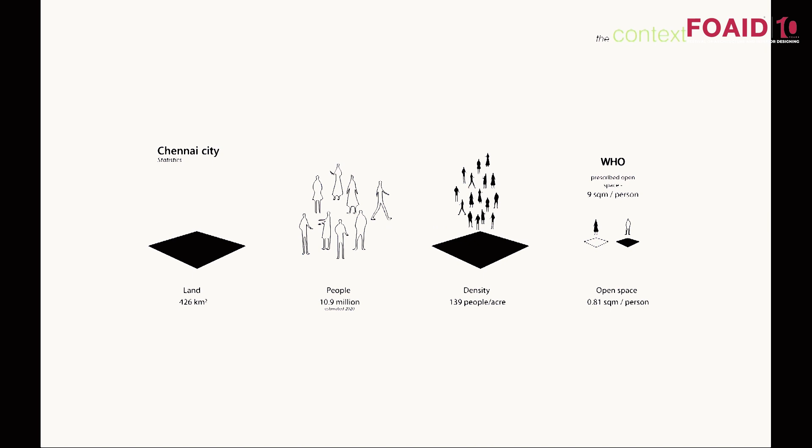So what is the context in which we practice? I think it's very important to understand our context, because much of our work is driven by this understanding of what that context is.

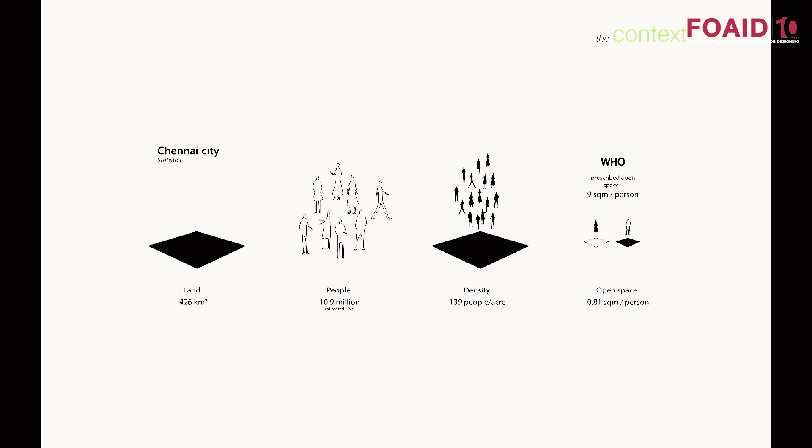This is, for example, Chennai as a city. It has a land area of about 426 square kilometers with about 11 million people, and has an open space ratio of about 0.81 square meters per person. If you compare that with what WHO proposes, one needs about 9 square meters per person to create a livable city, and we are at about 0.81 square meters per person.

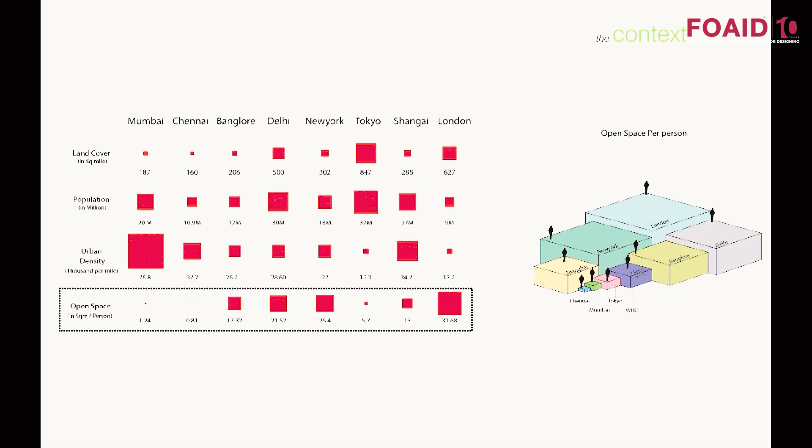If you look across the country, you will find similar conditions in many cities, other than probably Delhi and Bangalore, which traditionally had large swaths of open space. Most cities struggle to create this kind of open space. Another statistic is that about 50% of urban India goes to work by foot and non-motorized transport, which makes us extremely sustainable the way the cities are right now.

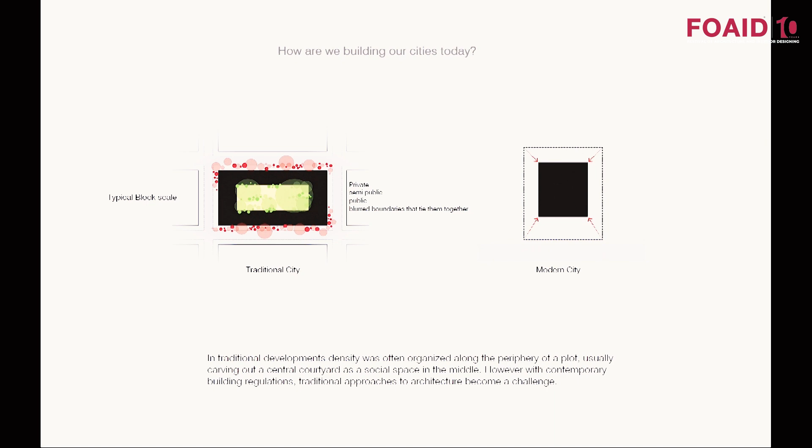If you look at our development regulations, we are actually organizing density in the most insensitive way, with the idea of creating not a sustainable walkable city, but a fragmented, non-sustainable one. If you look at the traditional figure ground, density is often organized around the periphery, while if you look at modern cities, the way we build, looking at our building regulations, we leave a setback and put the density in the least useful part of our site.

This becomes an extremely challenging proposition for us when we practice in a context like this, and hence we continue to create cities which are dominated by cars and not by people.

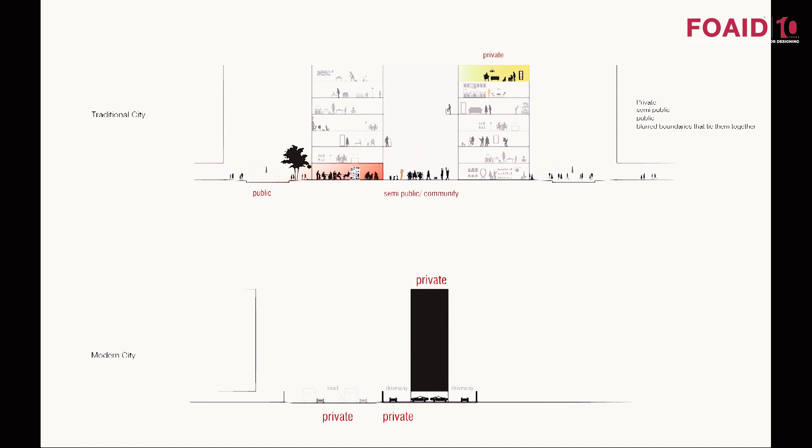A lot of what we do is a result of the kind of building regulations we have. On top is your traditional development parcel, where buildings come in at the periphery with a courtyard in the middle. At the bottom is how we build our cities today, leaving setbacks taken over by cars and creating an object along the city. Our cities then become a collection of objects without any relationship to the city itself—a collection of real estate plots.

So for us as a practice, it was about mediating between these two scales, the city of objects and the city of people, and how you try to negotiate that realm and create a wonderful city for people.

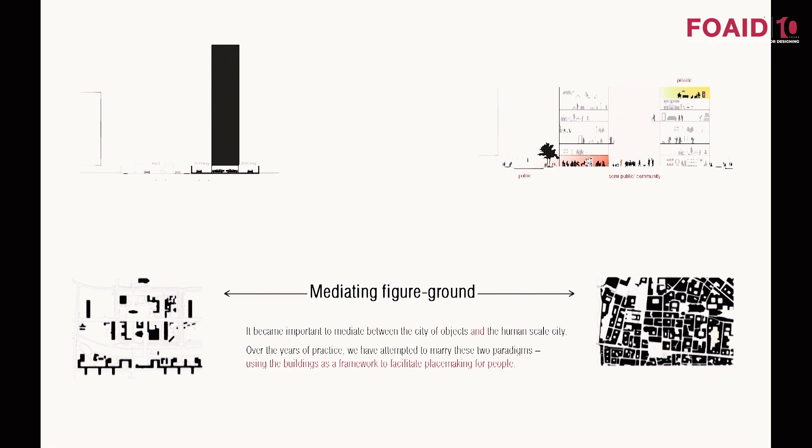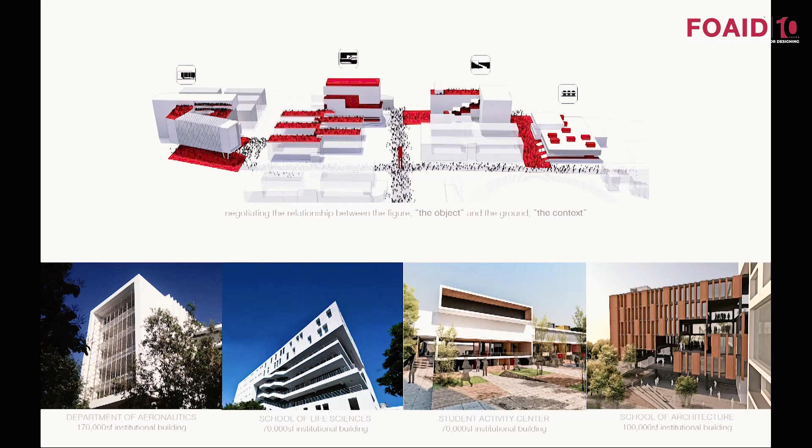These are a set of projects we've finished within a university in Chennai, where we continue to work on these aspects—looking at how to negotiate the relationship between the built and the unbuilt, between figure and ground, and working around existing building regulations to create places for people. This is a large, about 60-acre campus.

We did multiple buildings within the university. This first building is the Department of Aeronautics, where you can see in the section of the building that negotiation between built and unbuilt, and the idea of working with existing building regulations to create places for people.

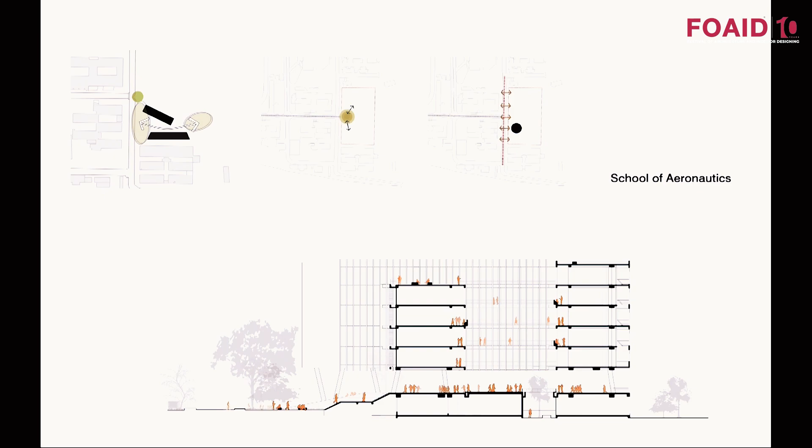Here is a campus which completely opens up—it's not an enclosed campus. The building just opens up to receive the larger campus. It becomes a wonderful place to come together and celebrate the idea of coming together, academics, etc.

So the building is lifted up, allowing the ground to be very porous. In a climate like Chennai, it becomes a wonderful place to congregate, and it just gets taken over by people.

In many ways, what Robert talked about in the beginning—how do you look at buildings as places as opposed to buildings as objects? Many of our explorations come from that thinking: how do you create places for buildings for people?

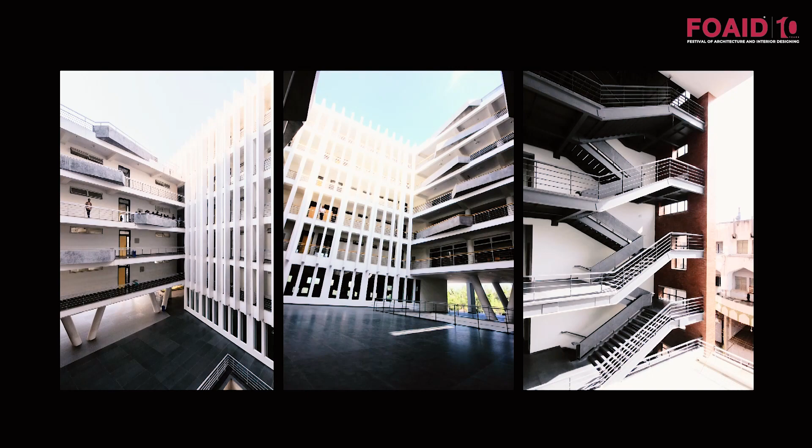It becomes, and when you start to build denser—because in this case a horizontal campus became a vertical campus—as you build denser, how do you allow density to be lighter? The idea is engaging with aspects that evoke your other senses, like light, air, rain, etc. How do you embrace them, and allow them to be experienced in a larger, higher density development?

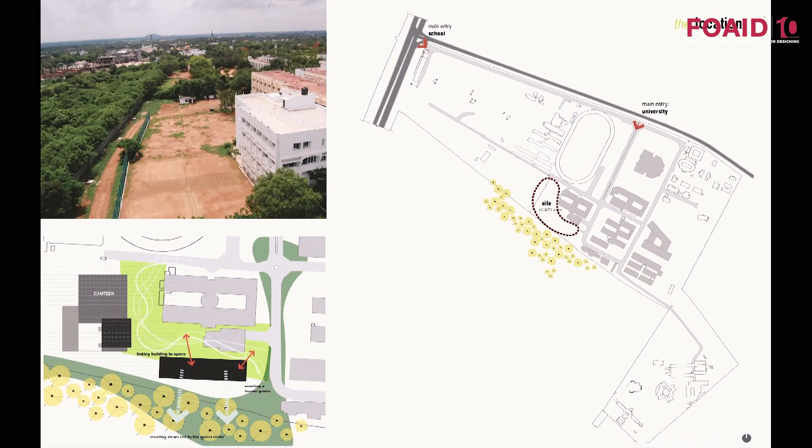This is the School of Architecture, which we just completed—again a very tight site within the larger campus. We started negotiating: we lifted up the building and allowed the campus to come into the building.

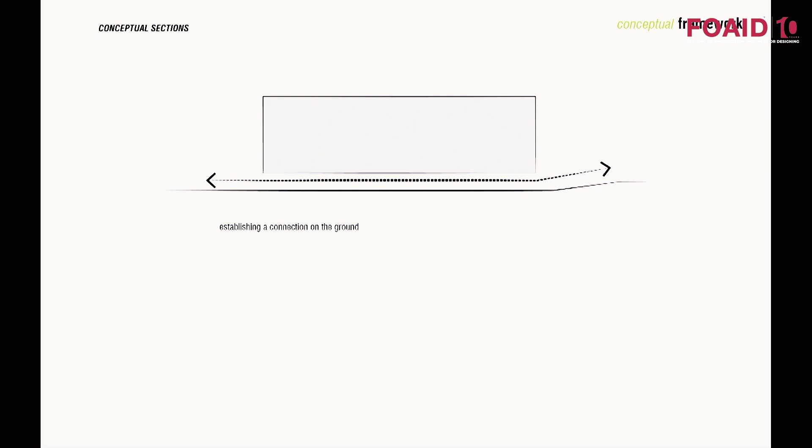We started with an atrium in the middle, but realized it wasn't working because it was a very rectilinear site. If you continue to develop the traditional way with an atrium, courtyard, etc., we realized it doesn't create the kind of spaces we need, especially in an architecture school.

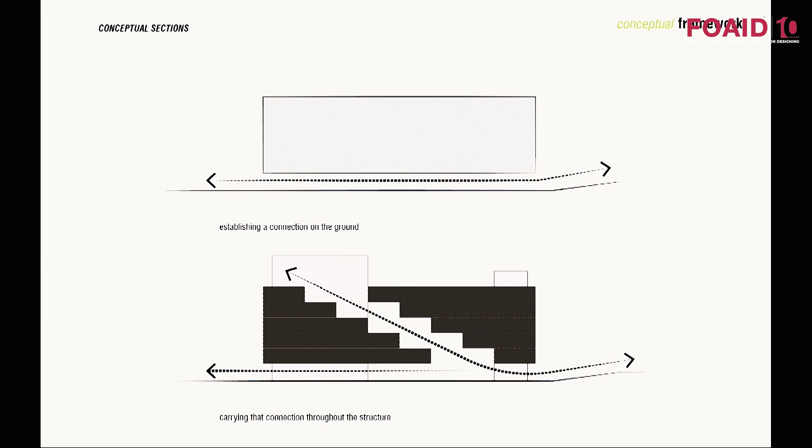So we created something called a sectional courtyard. It allows a courtyard on each floor, which then opens up into the next, and the next. In other words, that courtyard is created in section, and in a climate like Chennai, it allows you to be in that space throughout the year, throughout the day.

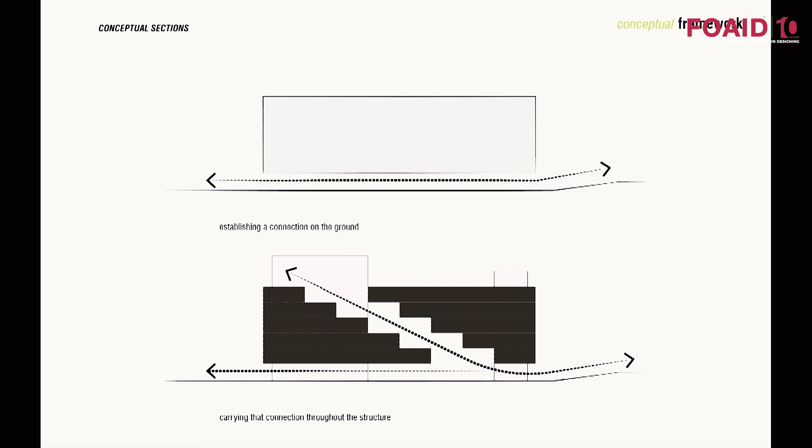It also allows us to create a new configuration of built and unbuilt, a new relationship between figure and ground, where the ground is actually within the figure in many senses. These are just some illustrations of how we handle this.

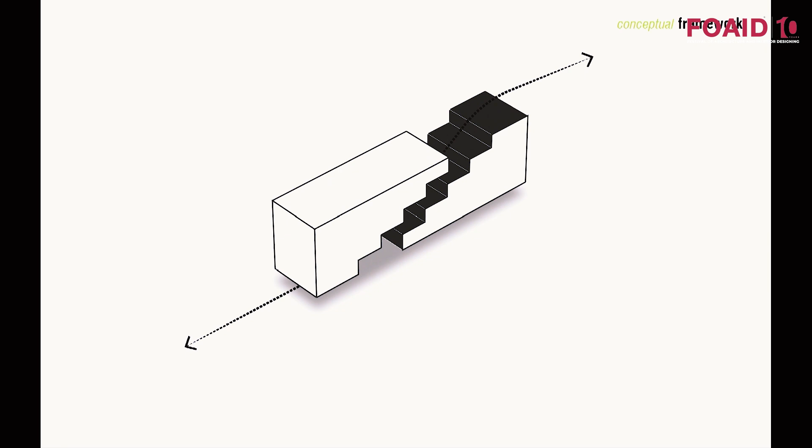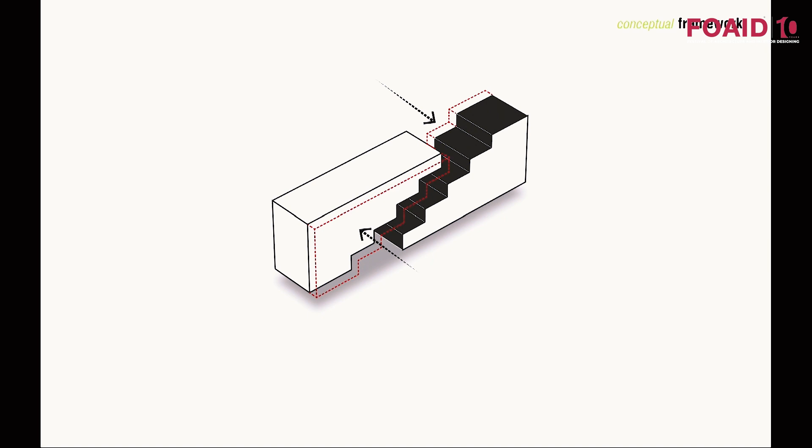We lifted up the building, and that space is carved out from it. We then allowed that space to cantilever over—one block cantilevers over the other to protect the space from the southern sun, so it's always shaded through the day. Then the larger program comes and hugs it.

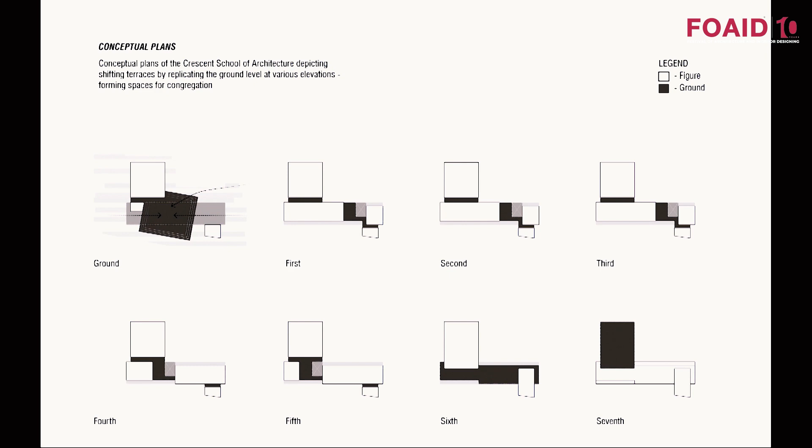These are diagrams of each of the floor plans. You can see each floor has a courtyard—the idea of creating identities for the people who occupy it, creating a sense of place, and allowing people to take over the building. The ground is left open more as an exhibition space, and each courtyard opens up, becoming a language of the building as well.

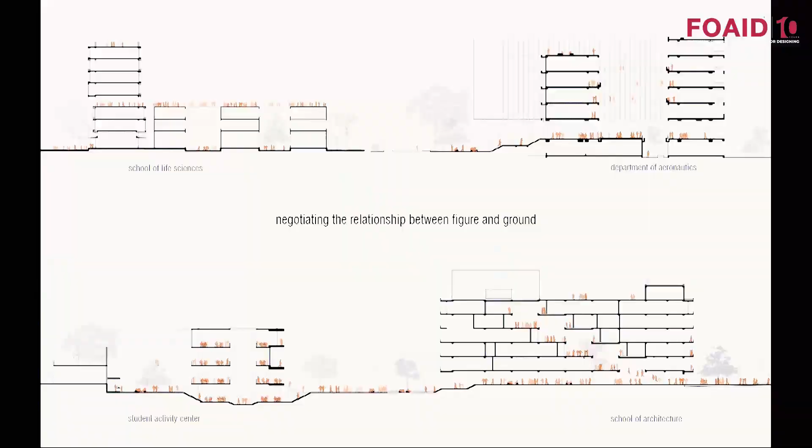Again, a very open campus, very porous campus—it allows the building to largely be a thoroughfare in many senses. These are some of the other buildings we are doing on the campus. You can see that section becomes a crucial part of dealing with density, creating spaces for people, and looking at buildings as a placemaking exercise.

Our thinking in architecture parallels our thinking about cities. It becomes important to negotiate between the private realm of the building and its role in the street and neighborhood as a means to strengthen community and local identities. Ideas of multiplicity in use, intensive typology mixes, and reconfigured spatial interdependencies need to be pushed to new boundaries. We believe the process of design must embrace all the complexities of context and allow the building to truly become an extension of the city. Irrespective of scale or ownership, the act of building collectively becomes the act of shaping our cities.

Housing is something we've been dealing with for the past 7-8 years. It's important to understand that housing is one of the most difficult typologies we deal with, especially in our context. Housing is a precondition both for work and for leisure. More than any other item of consumption, housing structures how individuals interact with others, communities, and wider collectives. No other modern commodity is as important for organizing citizenship, work, identities, solidarities, and politics.

Housing at many levels is under attack today. It's caught within simultaneous social conflicts—between housing as lived social space and housing as an instrument for profit making, between housing as home and as real estate. This is what we encounter every day, especially when dealing with housing as a typology.

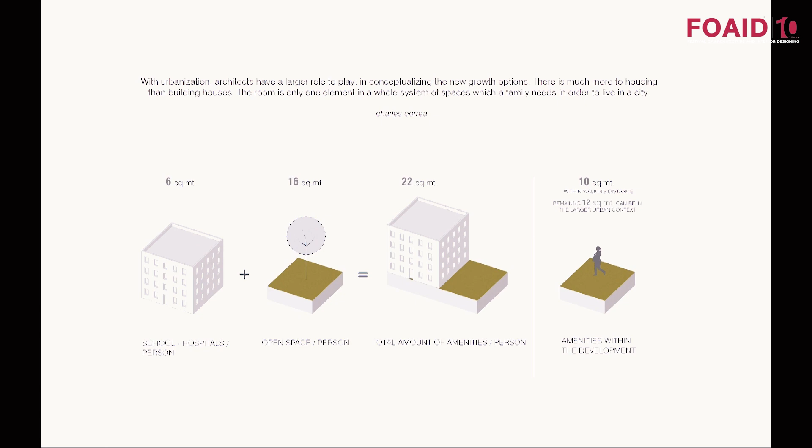This is something from Correa, who says that with urbanization, architects have a larger role to play in conceptualizing new growth options. There is much more to housing than building houses. The room is only one element in the whole system of spaces which a family needs in order to live in a city. He argues that about 22 square meters per person is required to create a livable city.

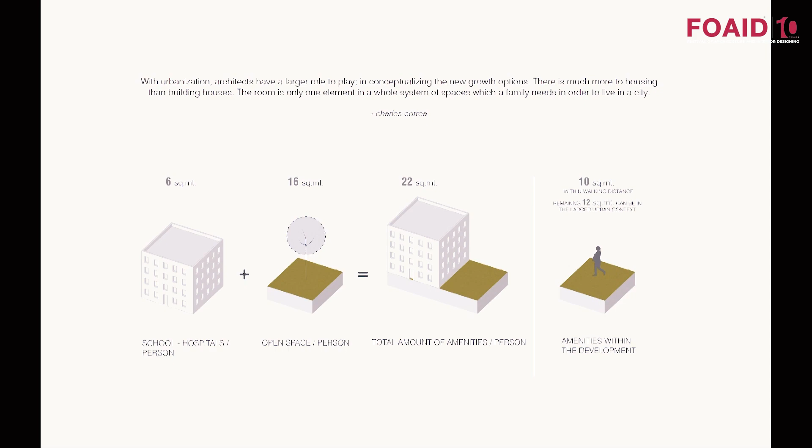He says that about 10 to 12 square meters of that you will find in the larger context, in the form of schools, hospitals, etc. But the rest of that 10 to 12 square meters you need to find within a walking radius, in your parks, open space, and social spaces. If you look at our developments today, you don't really create those kinds of spaces. You hardly create 1% of 1 square meter per person in many of the developments we do today.

A lot of it is owed to the way our building regulations are written. For us, it was very important that if you deal with housing, we need to create spaces for congregation, spaces that inculcate values, a sense of belonging, and vibrant spaces. Otherwise, housing is not meaningful. It is the idea of home, the idea of building community, that is so crucial.

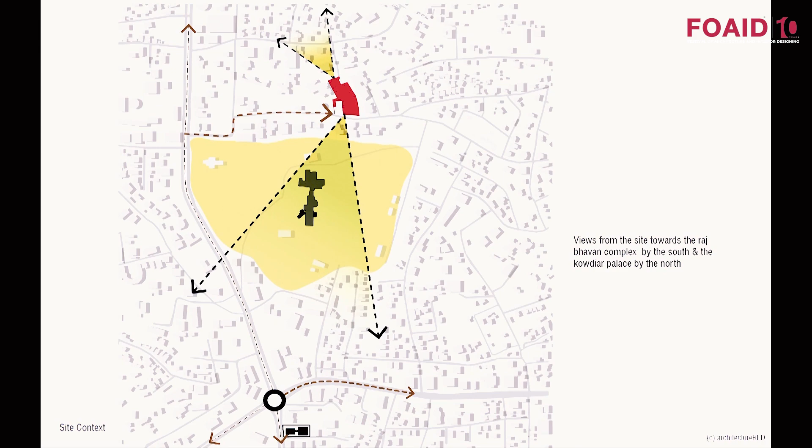This is a project we're just completing in Trivandrum, in the heart of the city, on a 1 acre plot. Kerala has one of the highest FSIs, about 4.5 to 5 FSI when you factor in all the development regulations, so it became an extremely challenging proposition. When we went in, the site was surrounded by these 12-story, 16-story buildings.

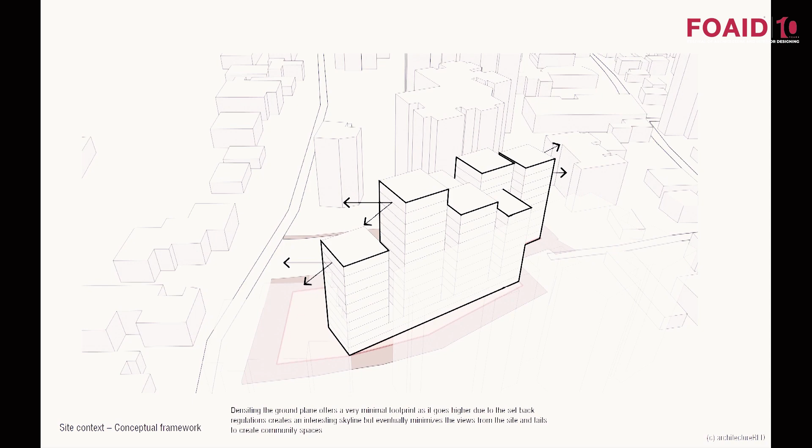We knew that if we built up traditionally from the ground, it would become an urban jungle. So we started organizing the density from the top. We could go much taller than our neighbors, so we started organizing from the 22nd story down. By the time we reached the third and fourth floor, we had achieved all the density required to be built on that site.

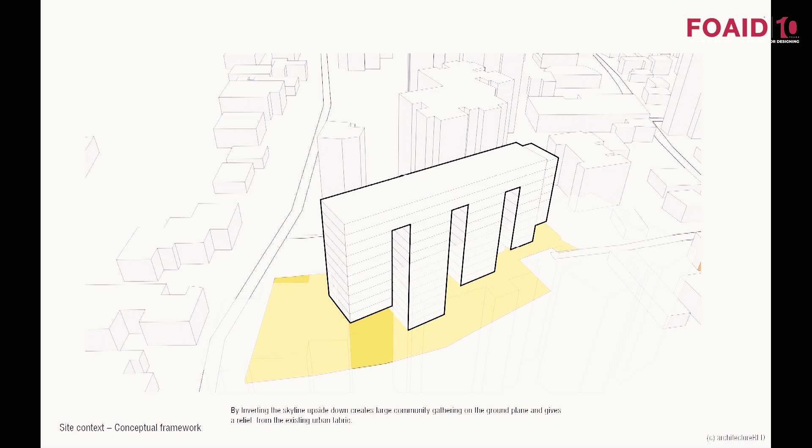The site was about 10 meters below the street. So what we did is get all our density up to the third and fourth floor. Because the site was 10 meters below the street, we allowed all the parking to come within that 10 meters, creating a natural basement. And we created a new ground that ties to that street.

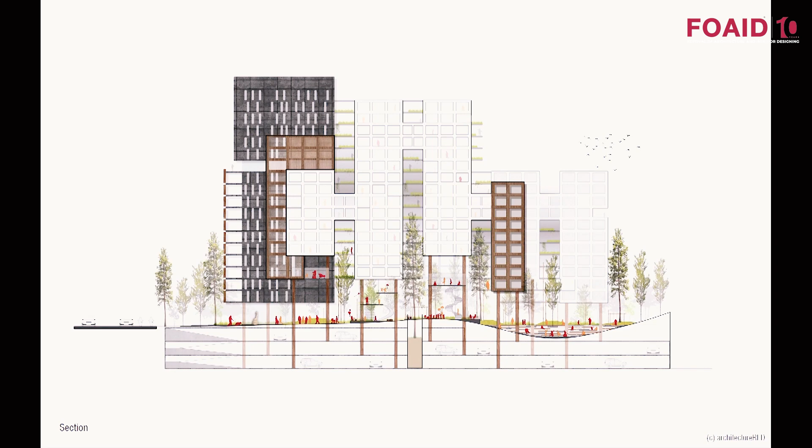The units start only at the third and fourth floor, so we end up creating the entire site as a park, becoming a community veranda for people to come and enjoy. That's how we looked at it, and we created multiple grounds as we went up. Each of these units was designed as if floating in that park, stopping at different levels.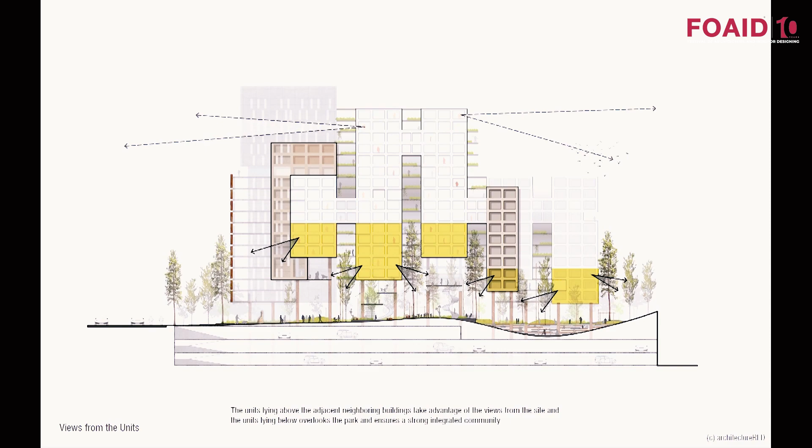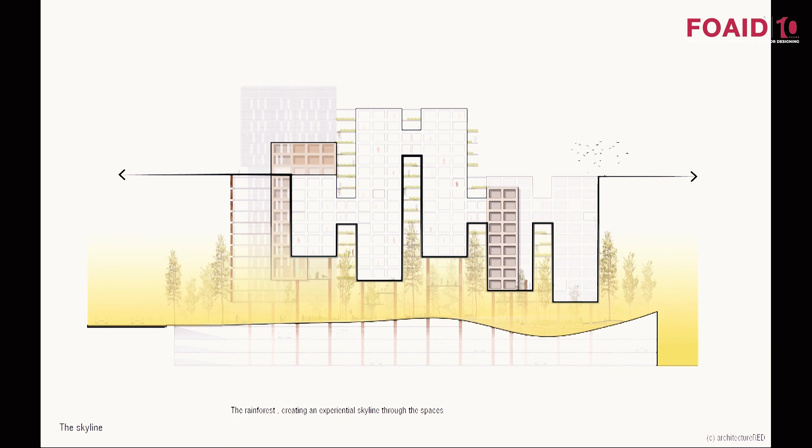This allows us to create a new context for the lower units, while the upper units open up to the larger context of the city of Trivandrum. In the process, we created a reverse skyline, and you can be in that space almost like a traditional veranda in a house in Kerala. This becomes a community veranda where people can come together, experience the rain, have a cup of tea, mingle, and enjoy with their neighbors.

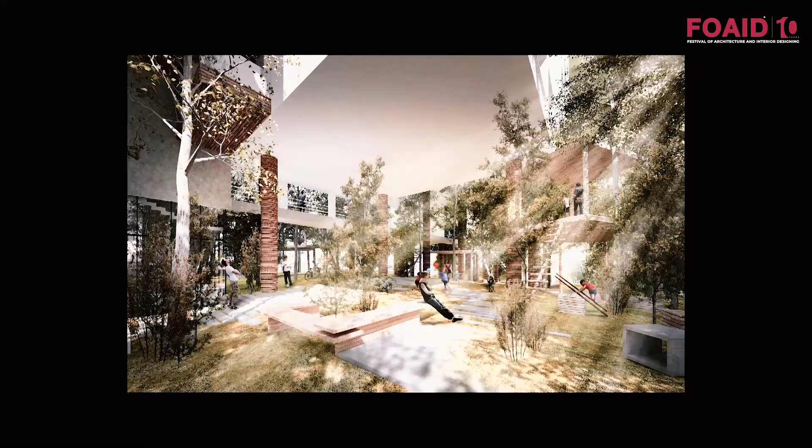These are some of the initial visualizations of that space. Each of the units gets transferred, all the columns get transferred except for each of the units at the higher level. There's a transfer slab which takes all the services, but the ground just becomes this wonderful 1-acre park.

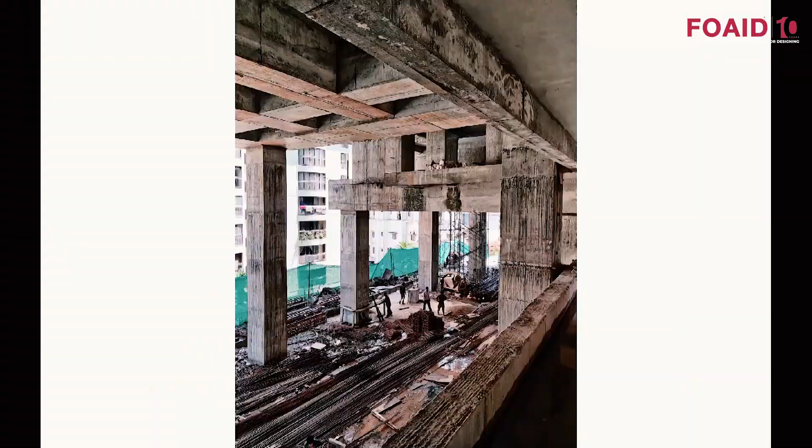That's that space. The landscape is yet to come in, but just to give you a sense of it, it is envisioned to become a public space and a public park for the community to come together. All the parking is hidden below grade.

This is another project, again in Trivandrum. It's in the heart of the city, very close to the other one, but right at that junction.

What was interesting about this project was that all around the neighborhood were these 3-story, 4-story neighborhood buildings which were all preserved. It's right opposite the Raj Bhavan, and this is the first site where the height was allowed.

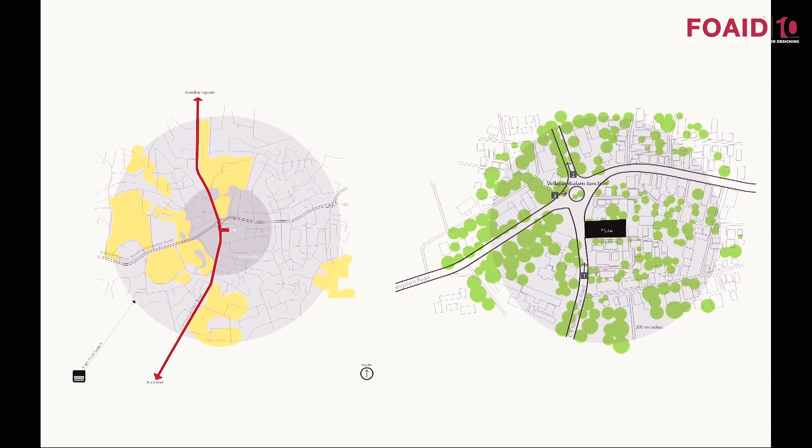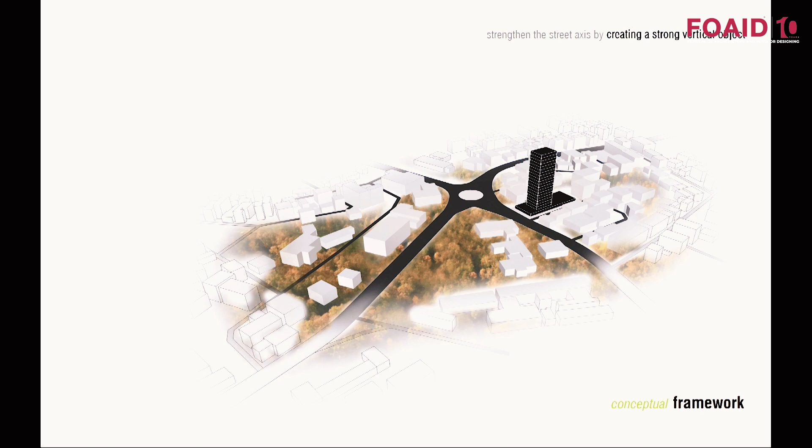So how do you negotiate with that density when you have these two kinds of cities? On one level, we knew that taller element would really anchor that junction, the Vellayambalam junction, and create a place as an urban node. On the other hand, there were street activities at a scale of 1-story, 2-story, 3-story, where pedestrians are so comfortable and used to it.

So on one hand we wanted to preserve that scale, while on the other we knew it creates a very strong visual anchor for the city, urbanistically speaking, and helps create a place out of that junction. So we started analyzing and mapping the context.

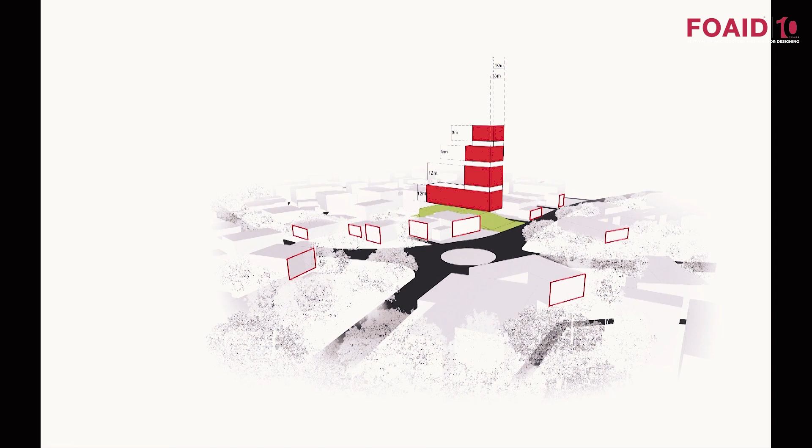We realized that the context is all these 3-story buildings with a swath of green, and we continued to map that contextual section. What we did is take that contextual section and kind of flip it up to create a section which allows these 3-story, 4-story clusters.

After every 4 stories, you create a community space, almost replicating that horizontal section of the city in a vertical fashion.

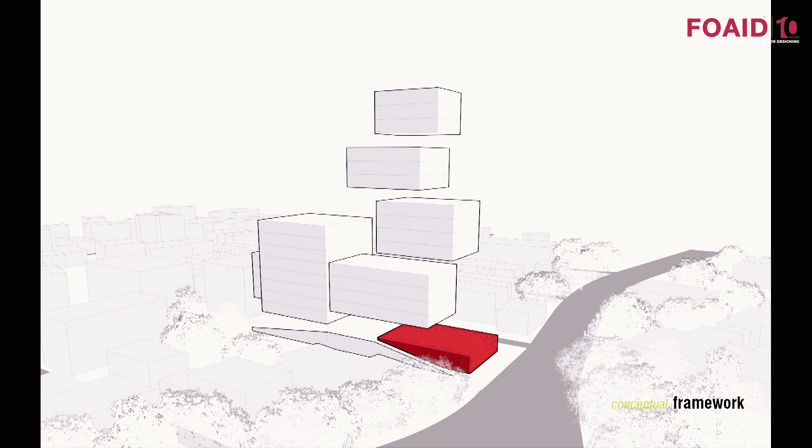We also wanted to organize that density so you continue the 2-story experience at the ground. We convinced the client to do retail at the ground floor, making the building part of the streetscape so it continues to activate it, while the rest of the density is pushed back and hovers around it, lightening that density while keeping the human scale at the street level.

That becomes the organization of the building - the programmatic organization of the activities. The ground floor commercial ties to the street and its activities, while the community spaces continue to anchor.

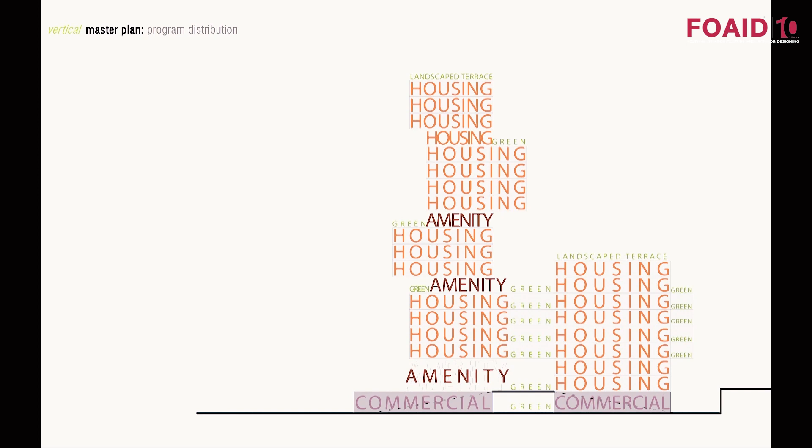The section was carefully drafted so you continue to activate the ground and make the building part of the streetscape, while at a larger city, urbanistic level, it continues to anchor the building. These are some of the initial studies.

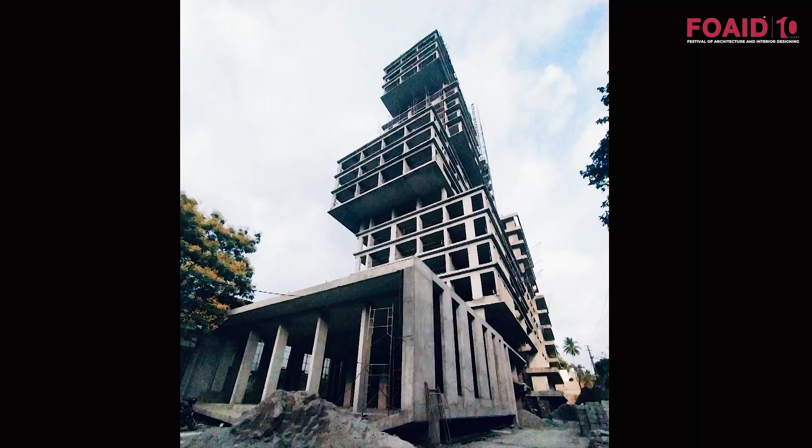The building is complete now. You can see the ground floor retail, it's a Starbucks now, tying into the streetscape and activating it, while these housing clusters get organized and the density is organized behind it. At a larger urbanistic level, it really anchors that intersection and creates an urban node for the city of Trivandrum.

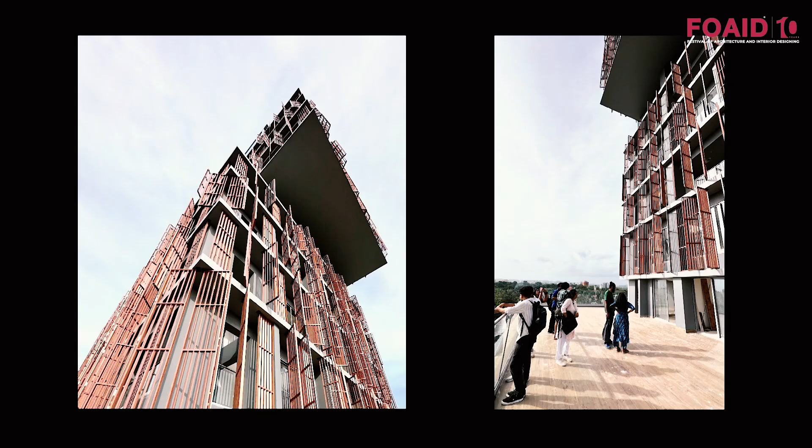This is my final project - a housing project we just completed in Bangalore. Again a very urban site, but when you go there you see these wonderful banyan trees and rain trees on the site. How do you negotiate density in a site like that?

How do you challenge it, how do you organize it, how do you put 2.5 FSI on a site like that? You start to imagine like this, but then realize you can't do that because there's a huge density to negotiate.

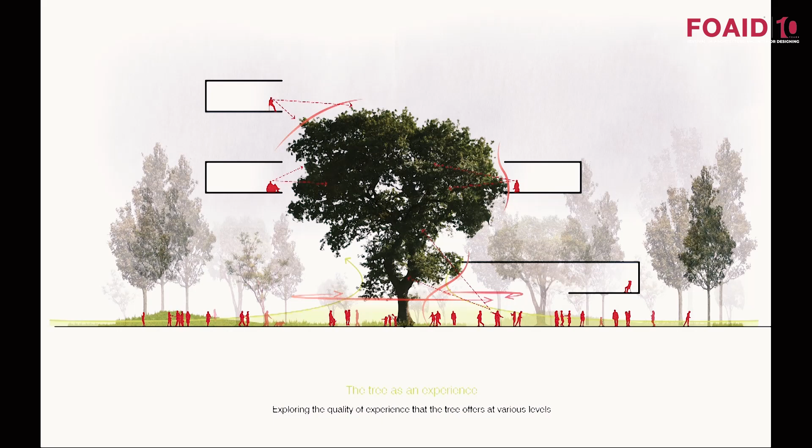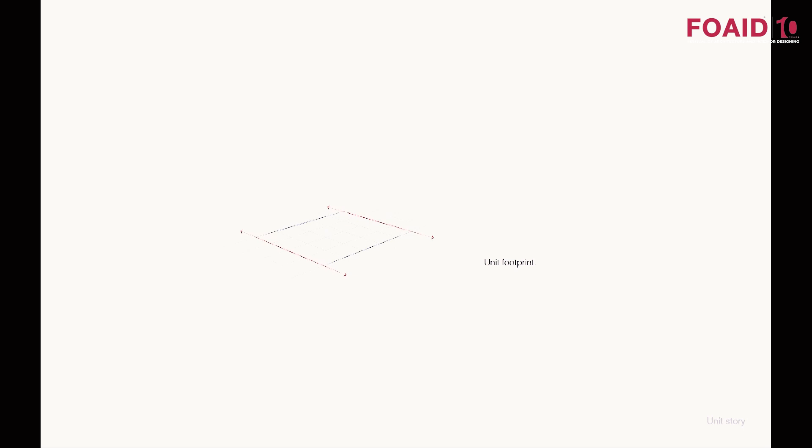So we started mapping the trees of the site and allowed the building to carve around these tree clusters. It wasn't just about preserving the trees, but how you make those trees part of day-to-day life going forward, so people get connected to those trees and create a sense of place and identity for residents, which is crucial for the idea of organizing density.

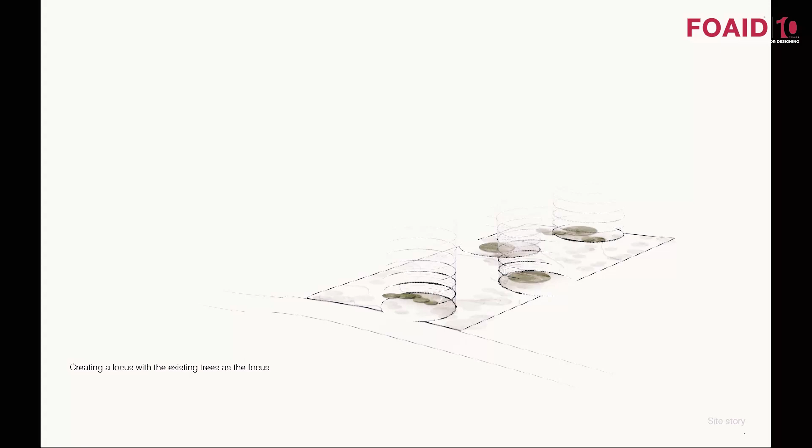Each of the units was designed so it opens up to a tree cluster. There are 4 units per floor, each organized to open into different tree clusters, with the building carving around that.

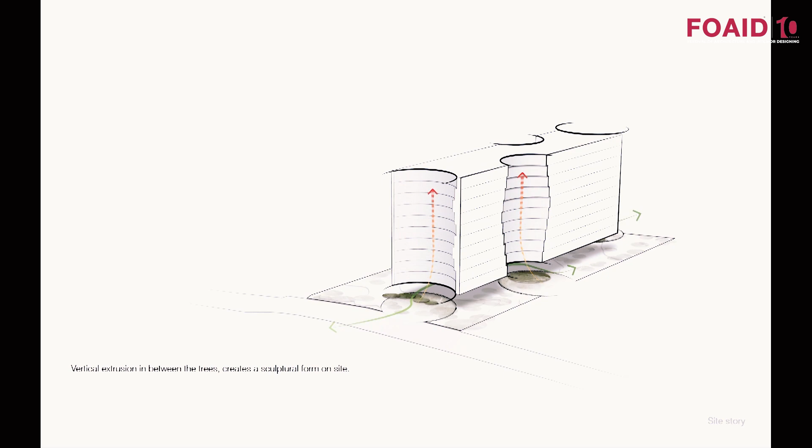We also convinced the client to do two building cores as opposed to one core, so that you can avoid the corridor, which allows these units to be completely cross-ventilated, almost floating in this thing. So that's the organization of the building.

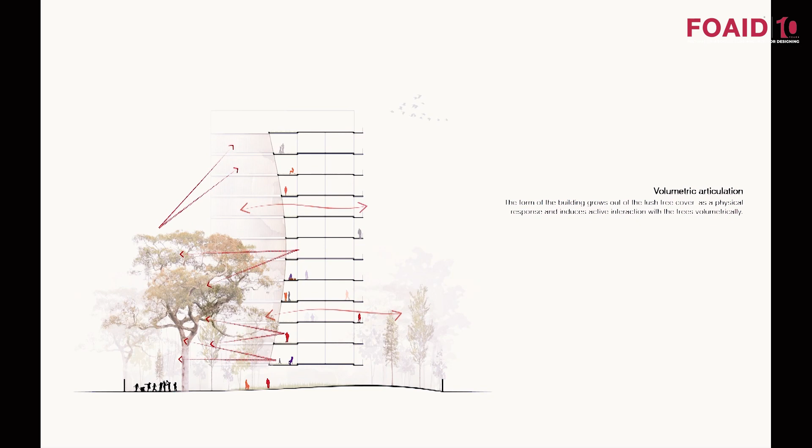Each of the units then starts to connect to the tree clusters. And that then becomes ideas of sections, sectionally organizing to connect that. Every unit—bedroom, living, dining, etc.—opens up into the tree cluster. So from a larger building idea level to each unit idea level, to allow cross ventilation for each of the homes it occupies.

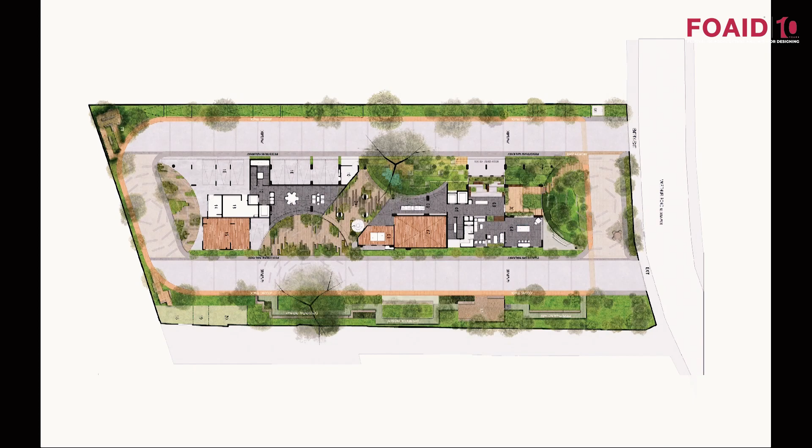The ground becomes a place to experience these trees. It becomes a double height volume. That's the banyan court, to which the reading lounge connects. So the ground becomes a wonderful place to experience these tree clusters.

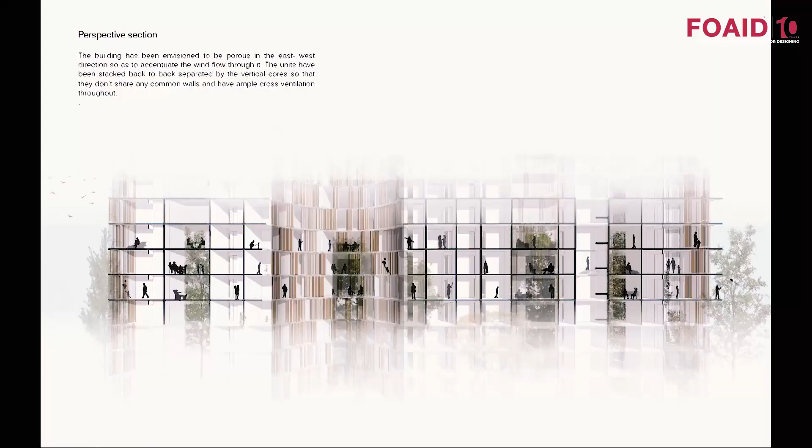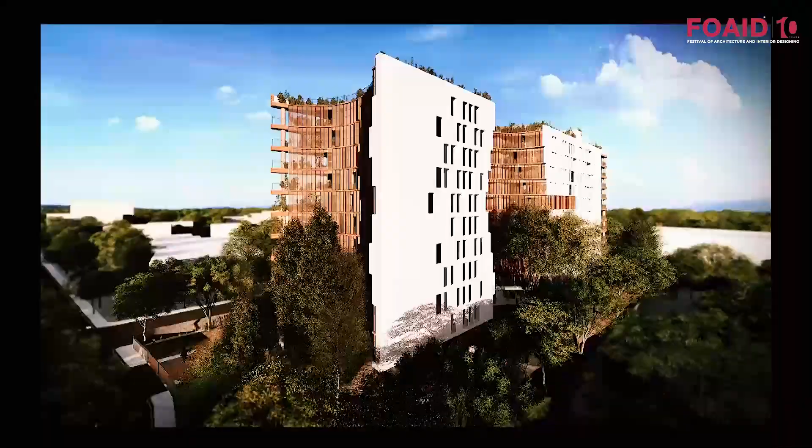And the roof again is activated as a community space—becomes an amphitheater, swimming pool, and other activities. The building is extremely transparent in the sense that it is completely cross-ventilated, allowing each of the units to open up in two directions and capture the essence of the trees, making it part of that experience and connecting people with those, thereby creating an identity.

These are some of the initial renderings of how we imagined it. The building is complete now—extremely challenging, as you may understand, to deal with all those trees. And the trees just start to do wonderful things which we never imagined.

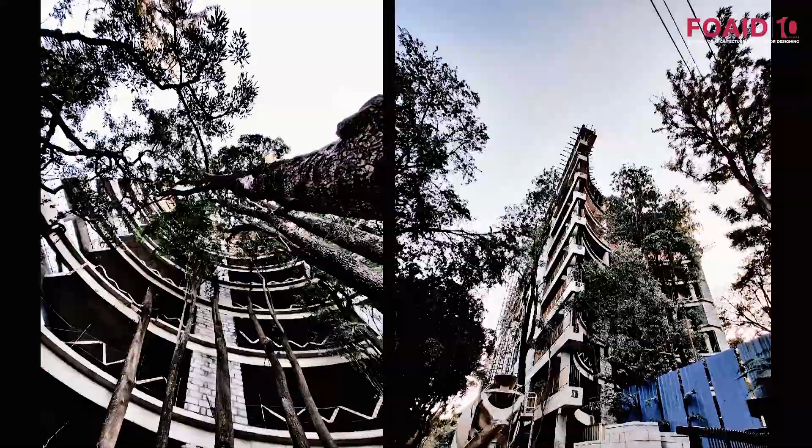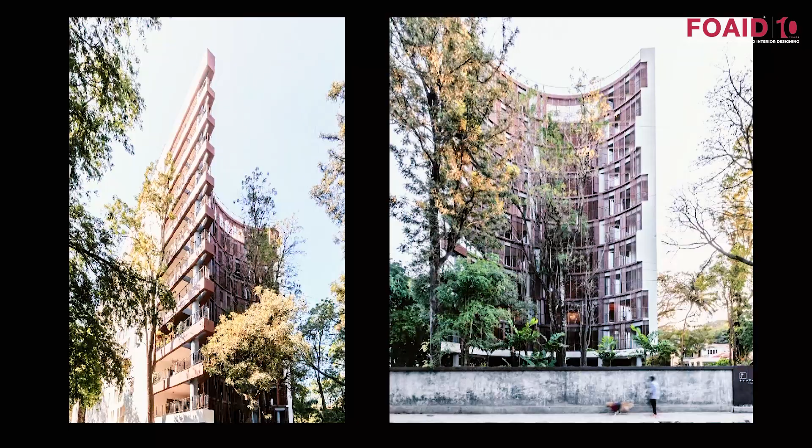When you go to the 7th floor balcony, you will see trees, the foliage coming into your balcony, and it just allows the trees to really become part of your day-to-day life. You start to experience the city in a completely different way, because these louvers allow you to be in that space and have a space which constantly changes throughout the day, because of the way you can manage the light, control the light, shadows, etc., that comes into those buildings.

So it becomes a very personalized space. You engage with it in a very personal way, and that space becomes extremely intimate. When you choose to make it intimate, it becomes extremely open and connects with the tree when you choose to have that. So the idea of modulating that space and allowing it to connect to those tree clusters becomes extremely challenging and important in creating a sense of identity.

We no longer live in a world of unlimited land resources. Buildings without a relationship to the land cannot continue to be the norm. Cities are increasingly becoming a collection of objects with little concern for their relationship to each other, or for the larger idea of the city. Spaces left between them have become undesirable and uninhabitable.

Cities need squares, parks, walkways, spaces for children—places integral to community life that encourage human interaction and the sharing of pleasant experiences. We must develop a sensitivity to public space in urban and suburban environments, where the space between is becoming more important as densities increase. There has to be an organic relationship between buildings, people, sidewalks, open space, and park—not just isolated buildings rising up. The challenges we face today—we will need high density, but we also need an intense use of the land.